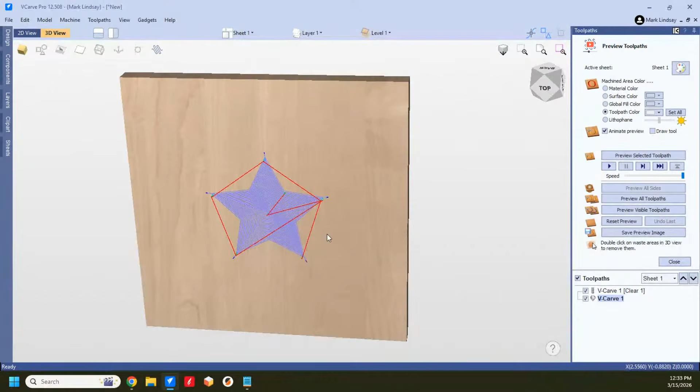We're going to spotlight this, referring to the molding toolpath here. You create your knife scale curvature within the molding toolpath, calculate the toolpath, preview it, looks great. Then you come over here and try to V-carve on top of the molding toolpath. You click on project toolpath onto 3D model, and you get no suitable vectors. There's no model, there's no component, it's not going to carve onto that component. The reason is because the molding toolpath does not create a 3D model, it does not create a 3D component, it creates a toolpath.

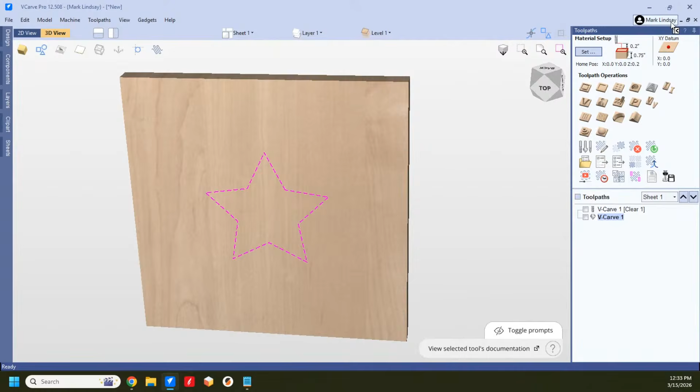That's why when you use, let me make something here real quick. Let me close this. We're going to go over here into the 2D view, I'm just going to jump into my clip art, and we'll get a molding profile, I'll just use this one, no special reason.

I'm going to jump over here, we're going to select this, go into the molding toolpath. I got my drive rail selected, hold down shift, there is my profile. It's going to cut that direction. Gap below toolpath, this is good enough, create sharp corners, and we're going to calculate. Tool will cut through the material, that's fine, I don't care.

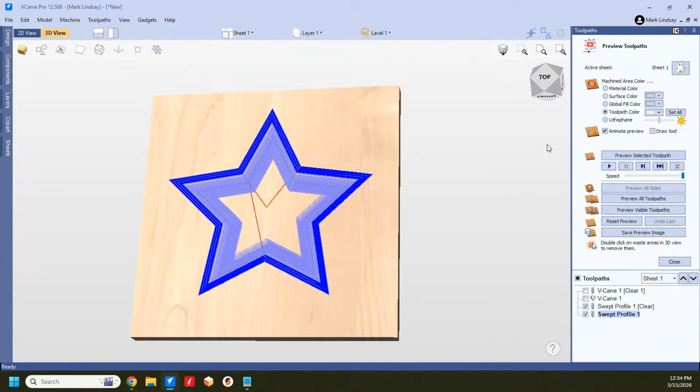Now, well, that goes really weird, but that's okay because it went from the bottom. We'll just preview that puppy. Okay, we're going to get rid of that. That actually kind of looks cool. But now I want to V-carve something in this.

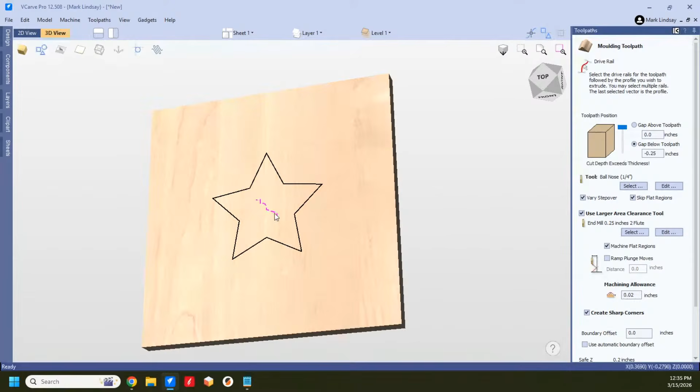No, let's make this more accurate. What we're going to do is, got to do it in the 2D view. I got to change the, make that the start point. So we're going down that way, so there's my drive rail. Okay, come out of node editing, there's my drive rail, there's my profile. So now let's calculate that. Yeah, it'll cut through the material, I'm fine with it. There we go. Now that's better, now we'll preview that.

Okay, so that's my star. Always trust your car to the man that wears a star.

Now, if I want to V-carve on this flat, I'm fine. But let's say I want to design, let's do some text here. And I'm going to do just standard text. There, just put my name in there. Close. I'm going to take this down here. All right, there we go.

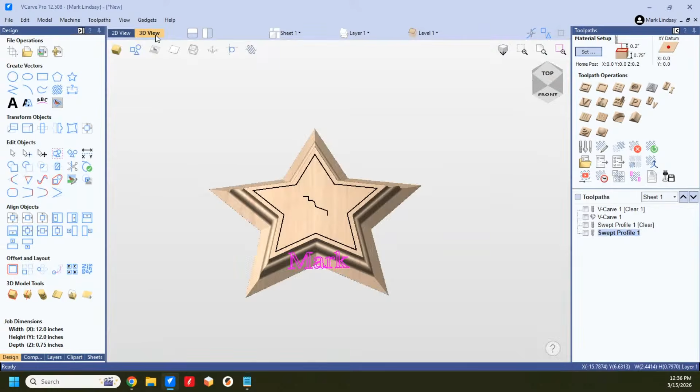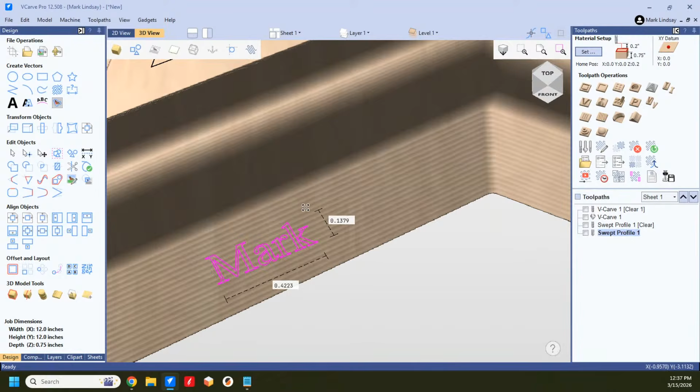Now I'm going to resize that. Hold down Shift. All right, now I'm going to drag it over here. Rotate about like so. Make it a little bit smaller. Bring it up, come on. A little bit bigger. There we go. That's more realistic. Okay, now I got my text selected.

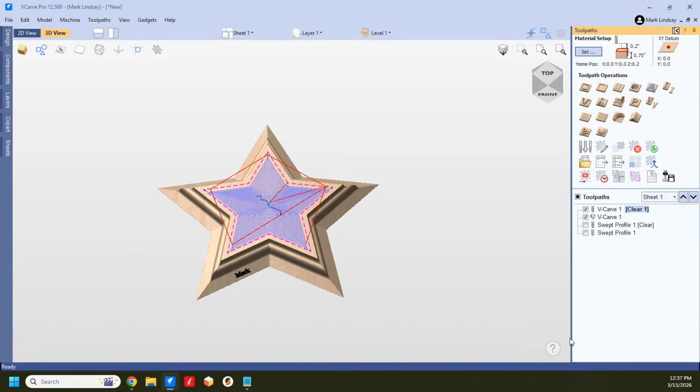Shoot over here. Go into a V-carve toolpath. Project toolpath onto 3D. Whoops. Close. Let me get rid of these two here first. And we will delete all visible. There we go. Now I've got this text. We'll V-carve this. That'll work. Calculate.

Okay, that tool is too big. Okay, so it's empty. You see the red exclamation point, and it's in italics. That means it's empty. There is no toolpath. Now let's preview this one. Nothing. It didn't project onto this. There was no 3D model here.

Let's reset the preview. Now let's check this again. We'll preview that. And it engraved up here on the surface. The reason is because there is no 3D component here. It just creates a toolpath.

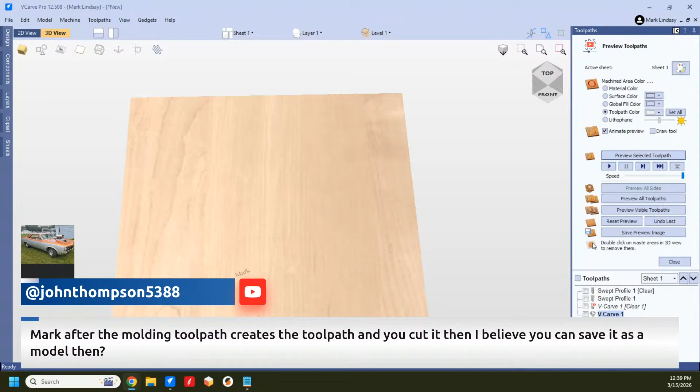John Thompson says, after the molding toolpath creates the toolpath and you cut it, then I believe you can save it as a model then. No, it creates a toolpath. It doesn't create any geometry. It doesn't create any kind of components. Not even in Aspire. Not even in Aspire.

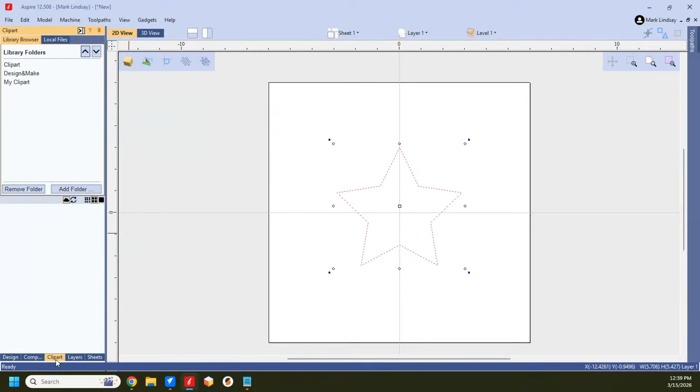Now, if you want to create the same thing in Aspire, let me open up Aspire here. What you would do is create your star. Yeah, we're okay there. You would create your star. Then you can come to clip art, and we're going to go to molding profile. We use the same profile. Double click to get one out there.

Then you would use your modeling tools to select the outside here, and you could do an extrude or do a 2-rail sweep. You can create a component. Let's see what you would do. Let's extrude. We're going to use this selection. We're going to start right here. And we're going to use this cross section here.

But I need to reverse the, no, I don't want to do that. Use the vector cross section, sweep between spans, use a component. No, I don't need to weave under/over. What I need to do, I need to close this because I need to change the start point on this. Otherwise, we're going to have problems. Make start point. There we go. Now I can do that.

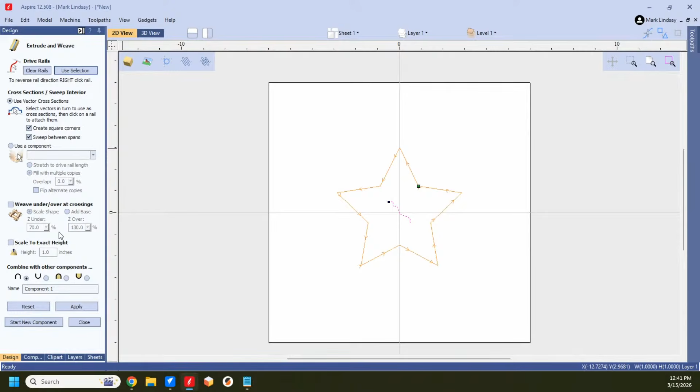Come out of node editing. Go back into extrude. Use selection. Now I can hold down shift and select that profile. Use that vector cross section. Create square corners. Sweep between spans. I don't want to scale it to an exact height. I'm just going to apply. And there is that profile, which did not do what I wanted it to do. That did not do what I wanted it to do.

Let me reset. I will turn off sweep between spans and let's see how that handles it. Oops, I did it wrong. There we go. Use selection. Let's see. Use selection. Hold down shift. Use the vector cross section. And apply. It still did it. All right, here's where we're having fun. Let's reset. I did that as add.

Oh yeah, it looks real cool, Rich. It would make a great surface for a picture frame, but it's not what I want. Vector cross section. I don't want to use a component. I might have to offset this and do a two-rail sweep, which I don't want to do. Let's get back here. Yeah, I think that's what I'm going to have to do.

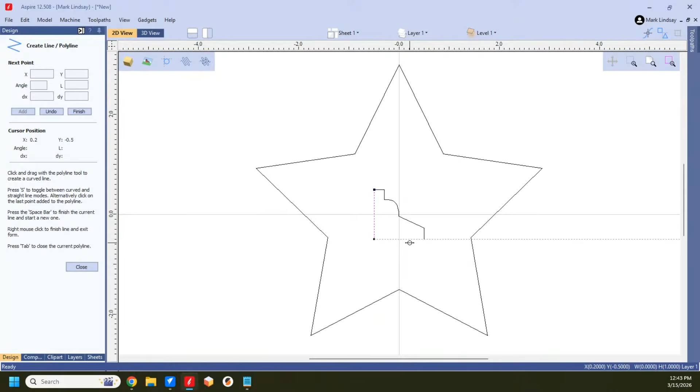Oh, no, wait, Mark, what are you doing? Okay. Back to 2D view. Let's go over here. They need to add a leg to this. I don't know what I was thinking. And let's do this. We'll activate smart snapping and boom. I forgot you have to add the leg. That gives it height. And we'll join that. One open vector, join. Okay, close.

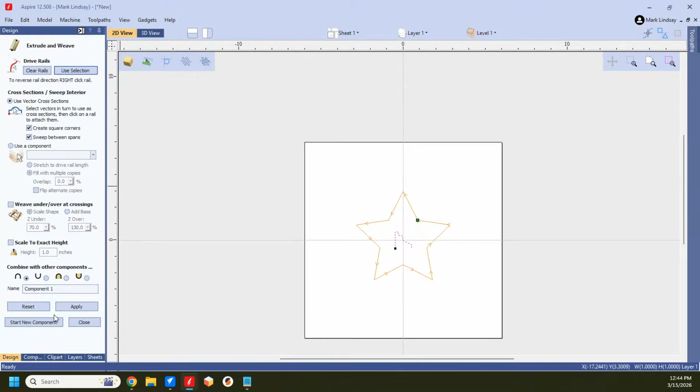Lord. All right. So anyway, extrude, use selection, hold down shift, select that. We're good. And we'll apply. That's what I was after. Holy underwear, Batman. No, I didn't need to reverse. I had to add a height to it. Okay.

Let's see. Let's take off the sweep between spans. Reset. We'll use selection. Click on the profile. And we'll apply. Now, it still cut out that center portion. Well, that's okay. I can fill that by creating a shape. Let's see, what is my shape height here? The components.

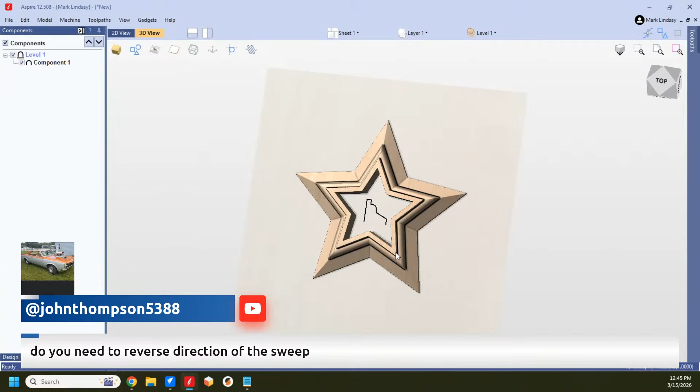Oh, well, I got to close that. That's why. Component.

There we go. Properties. My shape height is 1 inch. Okay, close.

Now, 2D view. I want to select that vector, and I want to create a flat shape using that vector. I want the base height to be 1.0. And we're going to do merge, and we're going to apply.

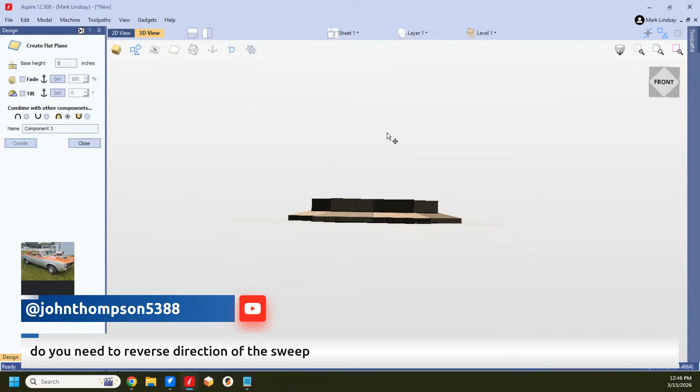Now I go into the 3D view and I have my flat. And nope, it went too far out. Okay. Well, anyhow, this is creating a component in Aspire.

Now it'll V-carve the text, and yes, it will carve the text at an angle, but not with the bit I had selected. It will carve the text without an angle.

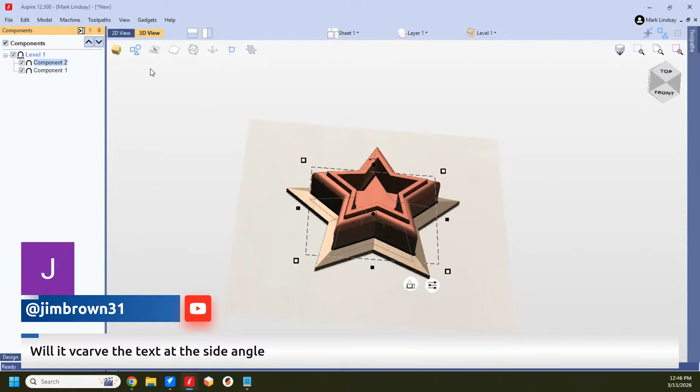Let me close this, and I want to delete. No, let's try combine mode, add. That's even worse. We'll just delete that component. There.

Turn off my vectors. We'll go over here real quick and V-carve. Oh, I didn't make any text, dummy.

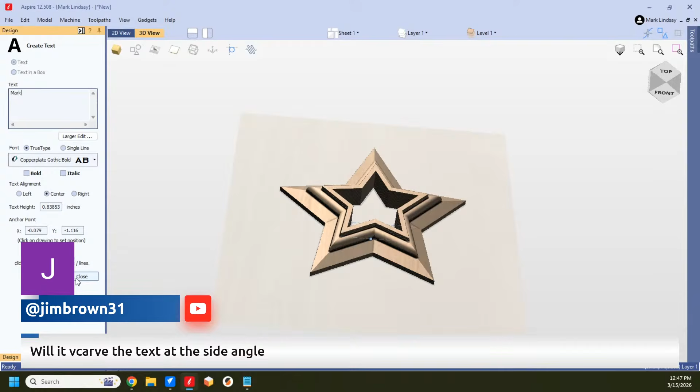Back to design. We'll go... Mark. Let's see, where is that tab? There it is. All right, close.

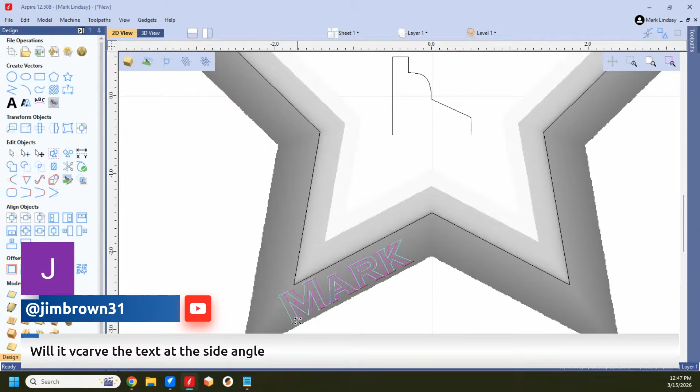And now I want to hold down Shift and make this smaller. Bring it down here. Rotate. Rotate a little more. There we go. Make it just a tad smaller. There.

Okay, so now, material setup. Okay, let's make my material 1.0. No gap. We're okay there.

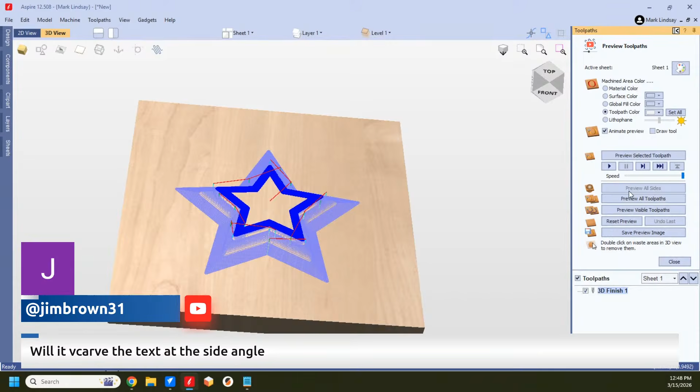Finishing toolpath. We're good there. We're going to do the model boundary and calculate, and preview. While that's running...

8thsinner says, an idea just came to me: work around by using a dome component supersized to put the edge of the curve against the curved edge of my length of scale. Absolutely. You can also draw a vector that represents the dimensions of the knife scale, select that vector, and use level clipping to clip that dome to the shape of your knife scale.

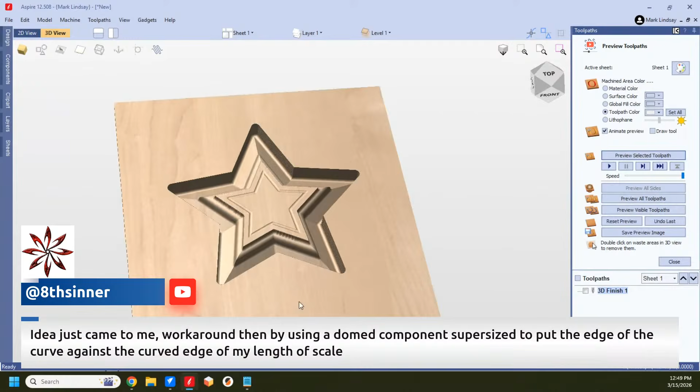All right, now whether or not the bit can actually reach down that far with this, this is not something that I would really attempt. I'm just showing the component. It can be done. Now turn on vectors.

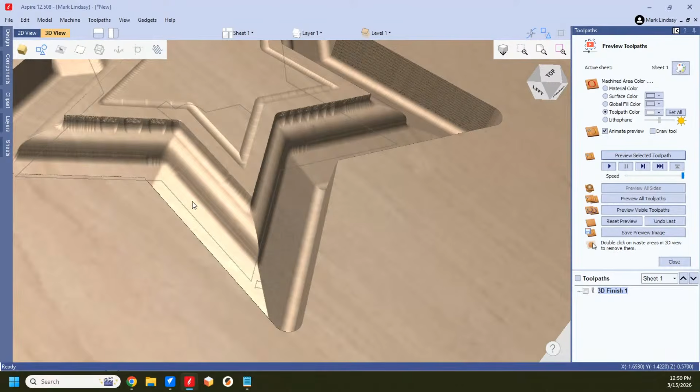Come over here and select Mark. Hello. All right, we're going to the 2D view. Now we'll select the vector. That'll learn you.

Close my preview. V-carve using not a 90, let's go with a 15 degree. And not going to do a flat—well, yeah, let's go flat depth of 0.0625. And I'm not going to worry about a clearance tool.

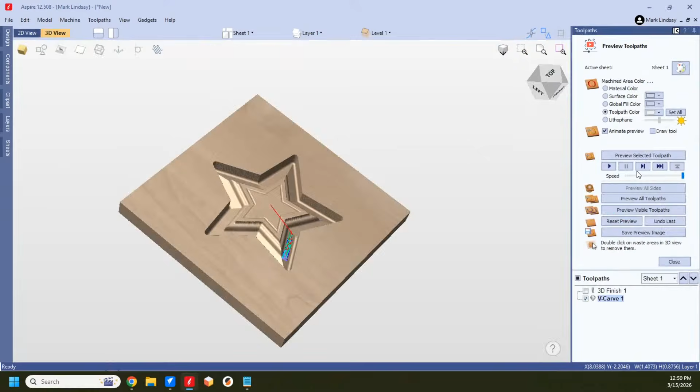Project toolpath onto 3D model. Calculate, and there's the toolpath. Preview, and there we are. Now, whether the collet can actually get down here because of this, probably not.

So what I would end up doing would be doing a little bit of math to figure out the offset out here. Or I could cheat like a big dog and just—oh no, I don't have to do that.

I can select the component and draw a vector around the component. Now, I don't need that vector. U to ungroup on my keyboard. I don't need that vector. I can delete it.

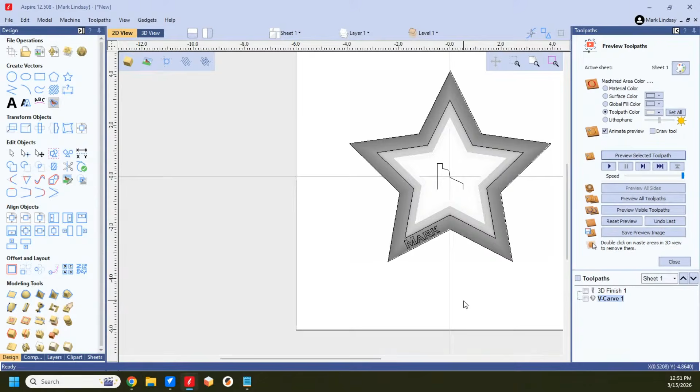I can come along here now and do a profile, cut to the outside. I would use a 1/4 inch end mill, not a 1/8 inch, and the reason is because the material's too thick.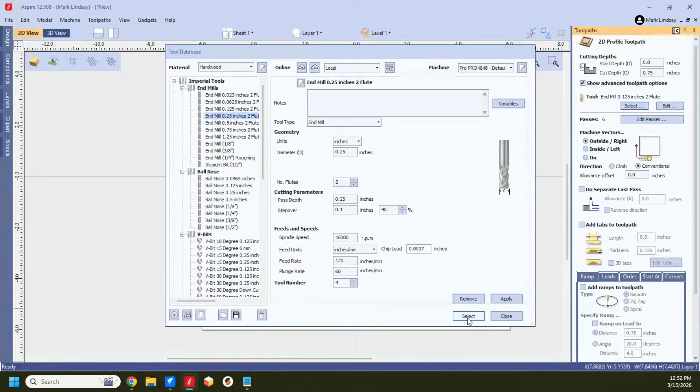Select, calculate, and I would do this before the V-carving. Select.

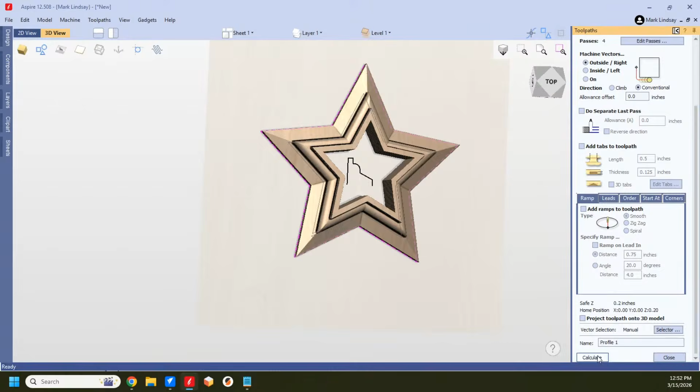Oh, I didn't change my cut depth. Z equals... Calculate. Now preview it so that it cuts it out.

Then you could come back and do the engraving. It should be able to reach down in there. So, that's how I would do that.

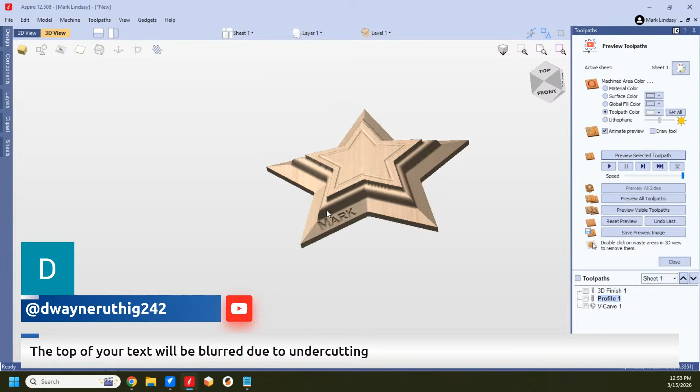The top of your text would be blurred due to undercutting. Yes, it would. Now, this goes into one of those things.

Just because you theoretically can do something doesn't mean that you really can or that you should. This was just an attempt to show that you can project a V-carve toolpath onto a 3D component.

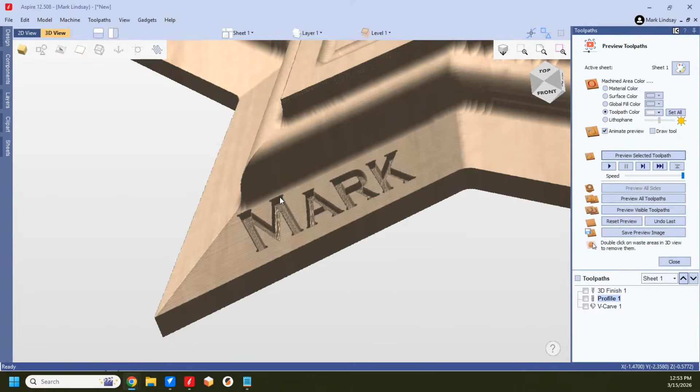But when you're in VCarve Pro and you use the—let's preview all toolpaths. You can see it just removed it. When you use the molding toolpath, you're not creating a component. You're creating a toolpath. There is no 3D component here.

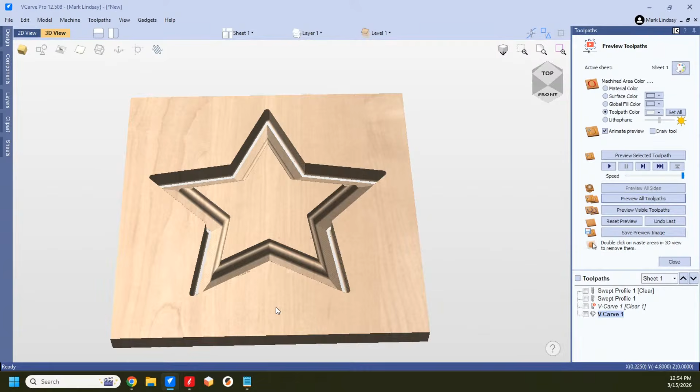That was my point. So. All right.

Hopefully that answered that, Eighth Center, and you are on the right track with level clipping. Create your 3D dish to curve it. Then create a vector that reflects the shape and size of your knife scale.

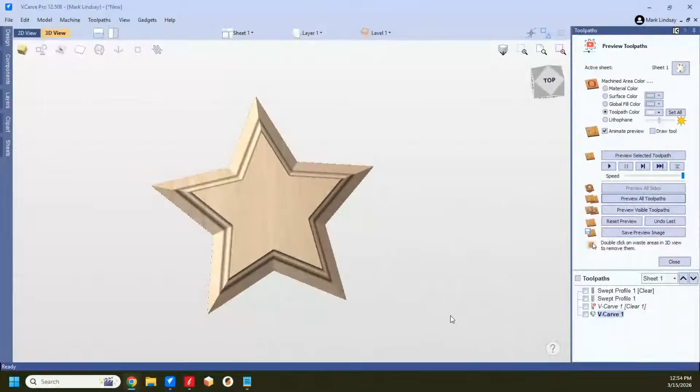Then get out of the preview, close the preview, shoot over here. In your component tree, you would select the vector, right-click on the level, and right here, clipping, apply.

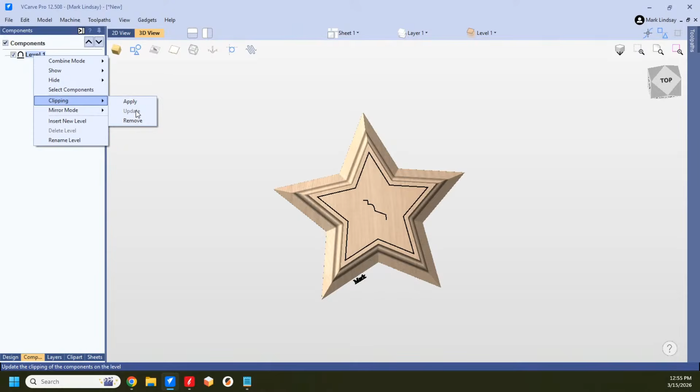Okay? Then if you make any changes out here after you apply level clipping, you will have to come in, because it won't fix it in real time. You'll have to come over here to clipping, and click on Update. If that doesn't work, you can remove level clipping and then apply it again.

But level clipping is an easy way to cheat.

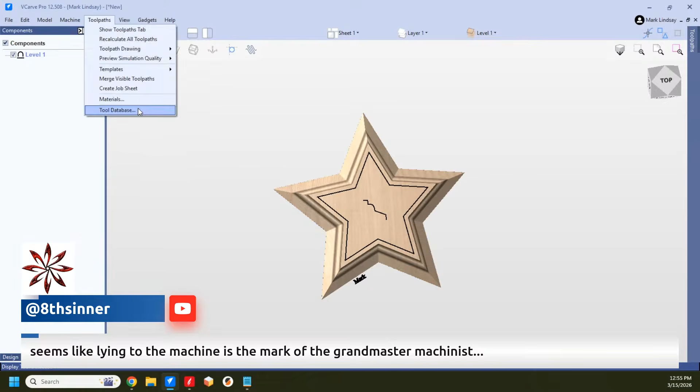Seems like lying to the machine is the mark of the grandmaster machinist. You're not lying, you're just exaggerating the truth, you know? A case in point is my keyhole bit. Vectric will not let you enter a bit in your tool database that creates an undercut.

And a keyhole bit creates an undercut. It's entered as an end mill. But the measurement that is important is the cutting depth of that keyhole bit. Everything else is entered as if it was an end mill. I just have to know that that's the cut depth, and that right there is the pass depth. That cutting depth is the pass depth. So the keyhole bit was entered as an end mill.

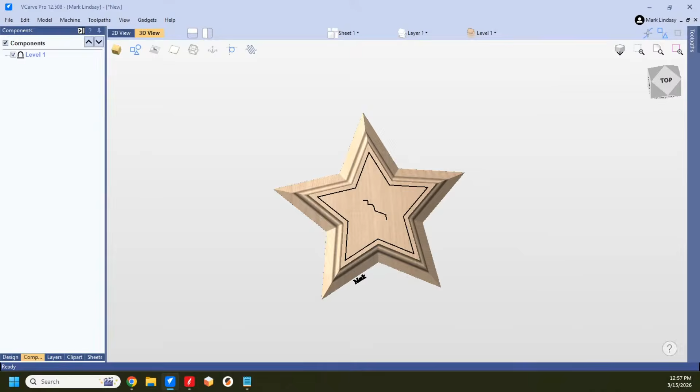When I use it, it plunges down to the full depth, makes its pass, comes back, then lifts out of the keyhole. So yeah, you are gaming the system. You're lying to the machine, but only because it's being obstinate. So lots of workarounds. When they say you can't do that, oh really? You know, yeah, you can, just not the way they want you to do that. So,

Okay, haven't tried keyholes yet, but it's on the list for a dovetail on a stool leg. Yeah, dovetails are the same way. It won't allow you to enter a tool that creates an undercut. So you have to lie to it and tell it that it's an end mill or whatever.

End mill is the easiest because you know you have to plunge a certain depth. Then you have to do your cut, maybe come back. In the case of a keyhole bit, you have to come back. So, but that's real easy to do. So.

Alrighty, well, I guess if that answered everybody, let's see here. Were there any other questions? No, it doesn't look like it. Okay, well, then I'm going to go ahead and wrap this up.